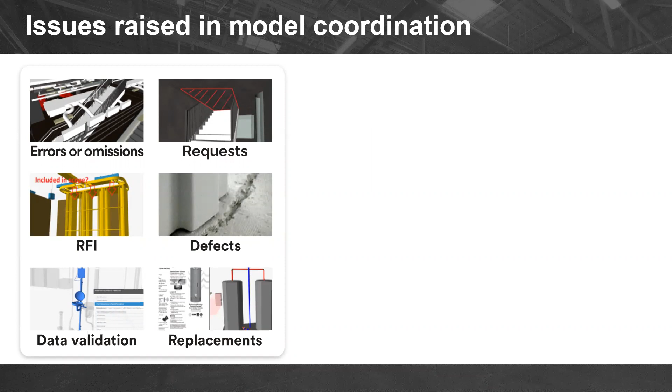So all of this ties into the platform, being able to use BIM Track as your source to access all of your issues, all of your communications while working inside of a project. Whether that be in your authoring or coordination tool of choice—Revit, Tekla, Navisworks, Plant 3D—or if you're just using the viewer on our web platform to take a look and coordinate, all of those things are at your fingertips to allow you to do your coordination in your platform of choice. So we're not trying to get you to change your workflow, we're trying to make your workflow a little easier in your tool of choice.

So that sort of brings us to what I'm sure a lot of you would agree is a fairly common workflow when we're collaborating on a project. We're going to have a BIM manager, and we all know there's many different names that encompass a BIM manager: coordinator, VDC coordinator, BIM coordinator, project lead, team lead. The idea is there's typically a group of people, or a person, that's in charge of getting everything in place, looking after that project, and then vetting it out to the rest of the team.

We get into all the people involved in the project, the architects, the engineers, all those people that are going to go through and do the design, review any clashes or coordination that comes into play. Then they take all the things they found and pass them along to the modeler, the people that are actually boots on the ground, taking a look at all that stuff and making the changes, like moving a door 6 inches to the left. And then, of course, we start that whole process all over again.

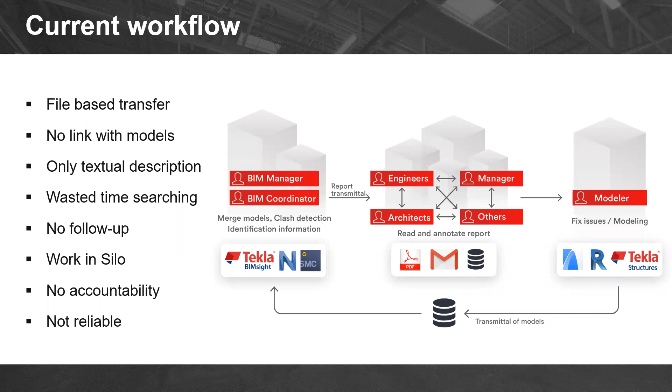So if we are working with the BIM Track platform, what this allows us to do is have that one central location where we have our communication hub. Our BIM manager, our BIM coordinator, has the ability to do their clash detection in their platform of choice, take those clashes, assign them to issues, and push them out to whoever needs to correct those issues.

Of course, we have the modelers with boots on the ground, the people sitting there to make those changes. As I mentioned before, the ones that are going to be moving that door 6 inches to the left, replacing a column, adding a column, whatever the case may be.

And then we have all the people that are going to be keeping track of the process. Perhaps they're not the ones doing the coordination, perhaps they're not the ones doing the modeling, but they're the people, the owners, the principals, people who have a stake in the project but might not be specifically involved at that particular juncture. They want to be able to see what's going on, add their comments, their two cents, and make sure those are put in place. Those people may not be working in a BIM software, so they have the ability to join in and take part from any web browser of their choice.

So that is the 30,000 mile high perspective of what BIM Track does. But I know everyone loves PowerPoint, so I'm going to take a second here to jump out of the PowerPoint, and we'll go ahead and hop right into the actual platform.

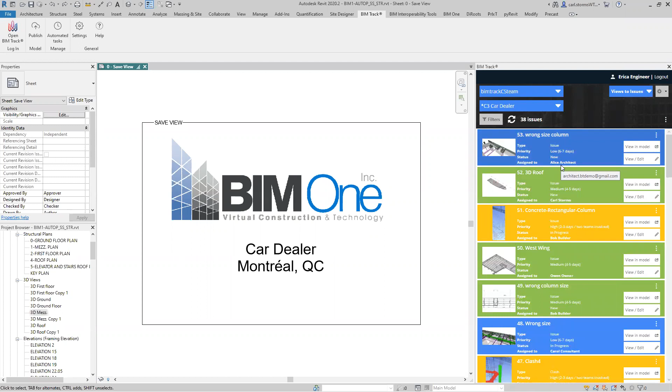All right, so let me jump inside of Revit. Here inside of Revit, this is our little add-in that gives us the ability to have access and create issues directly inside of our platform. As you see here, I'm currently organizing or taking a look at our issues based on numbers, so they're organized by the particular number. We can always use a filter to organize those issues however we want.

So we have our entire team of issues inside of here, but right now I want to put out those fires that really need to get looked after. So perhaps I'll go to my priority and look for my critical issues, and I say apply. Now I've got rid of the clutter - I have those particular issues that I need to deal with right away, and I can go ahead and take a look at those. In this particular instance, I'm just showing my priority.

All of these things like the priorities can be set in your user interface when you're putting it in place. So maybe instead of critical, high, medium, and low, you're using 1, 2, 3, and 4 - you can always set those up as you need for your project. Likewise with the coloring, you can choose any coloring scheme you want. Perhaps you don't like red as critical, you want something else - you can certainly choose that when you set it in place.

The nice thing about these is once you've spent some time in the platform, you decide, okay, I think I know my workflow. You can then set up a template inside of the admin portal that gives you your coloring, your statuses, all those things that you like at a moment's notice. You just apply that template and then it's set up. It also allows you to have multiple templates.

So if I have an institutional template, a residential template, a school template, whatever the case may be, you can have those setups because in some instances I may have different needs or desires than what I need with a typical workflow.

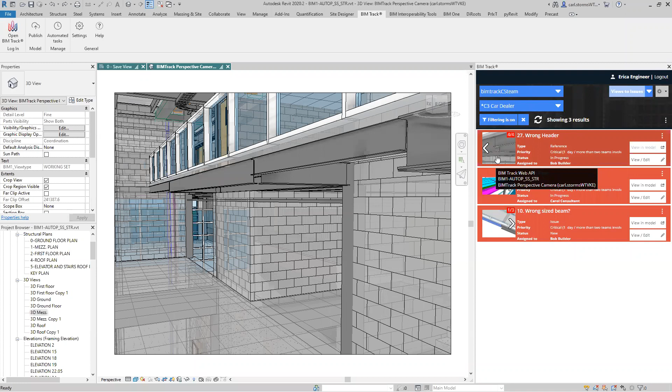We also have the ability to have multiple versions of that in place. So if we happen to have to tweak it or show something different, we can create a different viewpoint in place. If I want to zoom right in and make that what people see, I can select inside here and add that viewpoint into my project. As you can see, I have access to it.

We also have the ability to make comments. The whole idea is, well sure, it's great that I see that I have a header there, and yes, it's great that I clicked a button and it took me right to it. We then also have the ability to make edits to this, which means I can come in here and change things, assign to people, change disciplines. I also have the ability to add in comments.

For example, this has been fixed and I can post this. We also have the ability to take screenshots of what we need to do, to validate that it's actually been fixed. We can add comments, post it inside here. This gives us the ability to have a running understanding of everything that's happened inside of this process.

The other thing I always like to take a moment and discuss here is what we call issue tracking. A lot of times when you say the word issue, people automatically assume that means there's a problem, there's something wrong. There's an issue because I'm missing a door. There's an issue because the column is the wrong size. There's an issue because there's a hole in the drywall. And while those absolutely are all issues, it doesn't have to be an issue that we're using inside of the software.

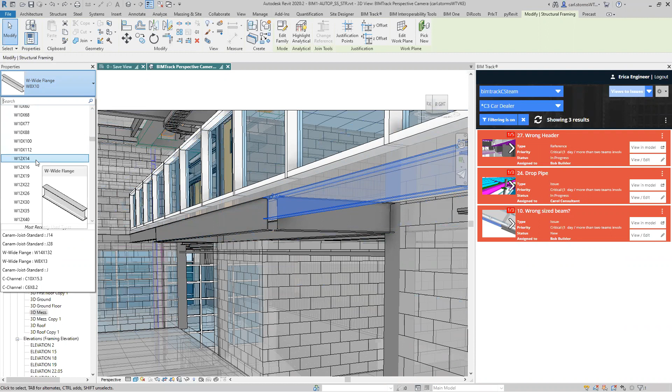So now I've made that change. Now that I've made that change, I can go back into here. I'm going to take that image to show that I've made the change, and save it in place. We said we'd fix it today, now it's fixed. Now that we've fixed it, the next thing we can do is come in here and say, instead of in progress, it's ready for review, fixed. I can notify who I want to go.

So I have to send it to Carl. He's going to validate that, and then I publish it.

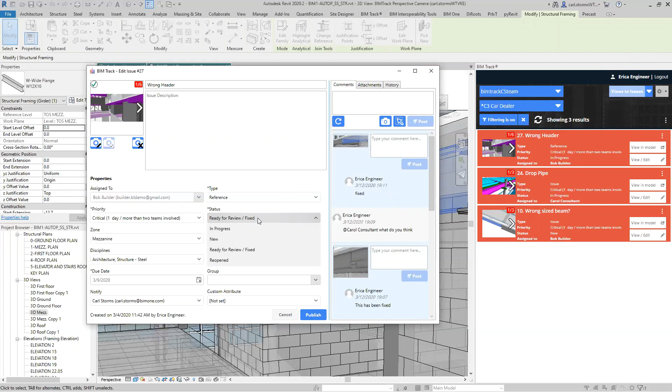One thing I like to point out that we like to see as a workflow: inside here, me as Erica the engineer, I don't have access to actually close the issue. I can say ready to fix and review, but since I'm not the person running the project, we recommend that only the BIM managers and consultants running the project have the ability to actually close an issue. That way somebody can say ready to fix, I say publish, and that status goes through.

Now if I hop over into the web browser, I click into my issues, you can see that I am logged in as Carl here, not Erica. I'm going to scroll down and use my filter again so that I can find my priorities of all the critical ones.

There's my wrong header that we were just looking at. I pop that into place. And you can see that we now have it ready to fix.

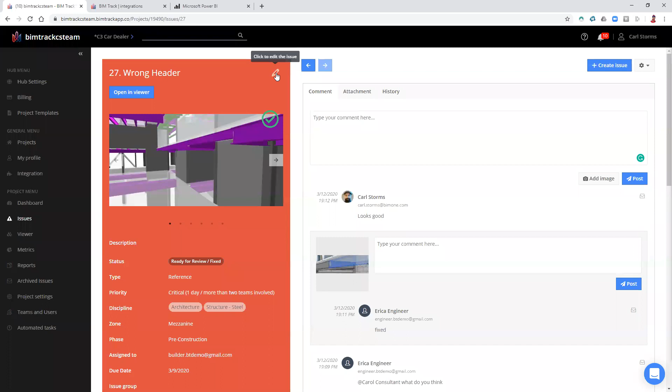I come in, it looks good, I can post that. And because I have the right permissions, I can now go in here and officially close this. I can say closed resolved because I have that permission, shown down below, hit save, and then we finish that up and we're good to go. We put that in the project. So we have that ability to do that.

You can see we could very easily see that information going from one platform into the other. Say, for example, since I'm in the viewer now and we're the owner, or perhaps the job captain, we don't work inside of Revit or Navisworks, but we need to keep abreast of what's going on inside of the process.

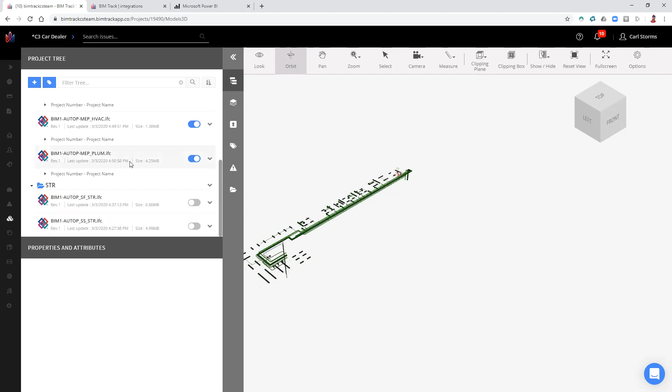So now I can come in here and start turning on my IFCs to see what's going on inside of our project. So now we've got our content turned on. Like a lot of viewers that are out there, very similar, we can navigate, move around, zoom in and out. The more we zoom in, the more information we get to see inside here. We definitely see that there is a clash here.

So we can very quickly create an issue by going to the Issues tab, create an issue. We have a couple options: either create an issue or localize. The main difference is that if we say create an issue, it's basically a screenshot of this entire area. If we localize the issue, it allows us to put a little dot, a clash sphere, right in this spot that gives us an exact location of the issue. In this case, we see it travels through many things, so I'm going to just create a regular issue.

So I say create an issue, it takes that location. I add in my information, type a description, and give it a status. Again, all of these statuses are configurable based on what you need them to be. We can assign our issue. So this is definitely a clash.

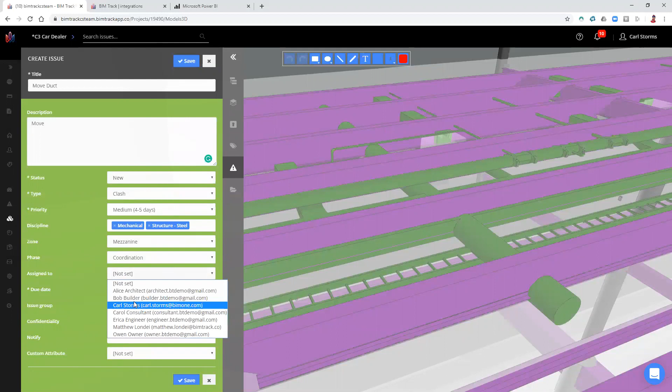You'll also notice that we have a few of these asterisks. Asterisks essentially mean that it's something that has to be filled in, whereas something not asterisked can be left not filled in. So it's going to be mechanical and structural. For the zone, again you can set it up—this is my mezzanine. And then I'm going to assign it to my builder. We've assigned that issue and put it into place. We now have access to be able to do that.

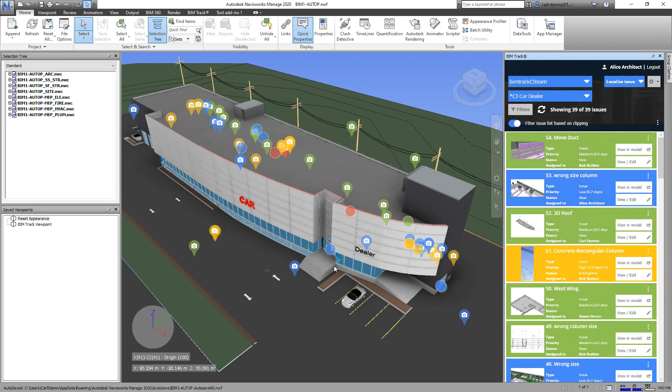If I just quickly pop into, let's say, Navisworks, same project, I quickly sync that up, and you'll now see that we have the ability to see that inside of my model. Now, I do know that I have a roof turned on inside of Navisworks in my architecture, so I'm going to go ahead and hide that, and then hide my structure. So now when I go to view the model, it's going to take me exactly to where that duct was running through, that we can see, we have that ability. It gives us the ability to go and see what we have and where it comes into place, and we can see that directly from there.

We can zoom in, take another one of those, and update our viewpoint.

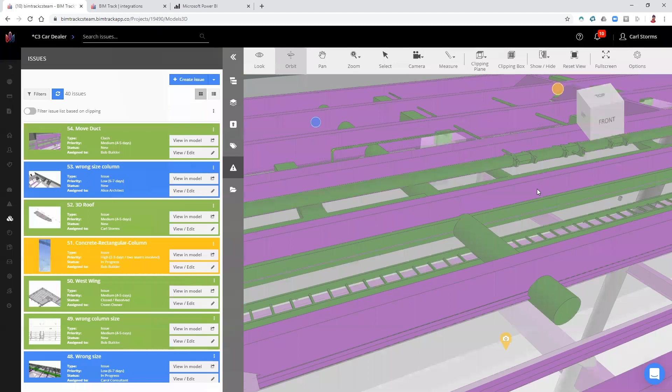Let me do it here. So now you see we have those two viewpoints in place to give me access to that content. Quickly jumping back into here, that gives us the ability to see through different platforms and view it inside the web browser.

Just keeping mindful of the time here, a couple quick more things to show. We can also do 2D and 3D at the same time. So if we go into our sheets, for example, and I turn on my mezzanine plan, this is going to give me access to a PDF version of the sheet.

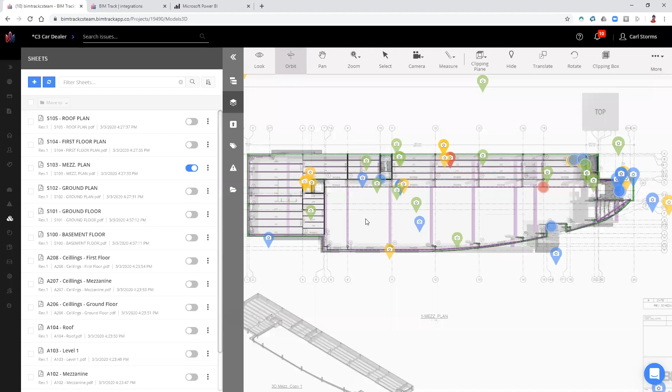All of the models are IFC models inside our viewer, and all the sheets are PDFs. So as you can see, it gives me access to all of my viewpoints, all of my clashes. And if I zoom in, we basically have the sheet in the right place and time, so we have access. You can see the 3D model, and we can also see the information on the 2D sheet that wouldn't be inside the model.

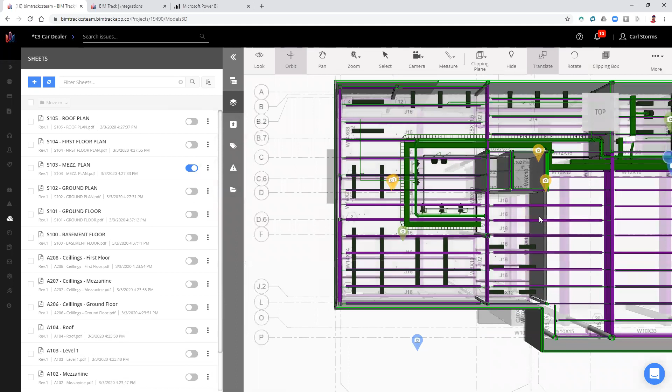If I use my view cube to navigate a little bit, you can sort of see that we've got that 3D functionality. And if we clip into our clipping plane, bring on the top, I can even start adding a little more information, so now I can start seeing that information in that 3D view. I go and look down, and I can now start seeing some of those things in 3D, as well as being able to read the information that comes through that 2D functionality we put into place.

And again, we could create an issue directly from here and be able to see what we want to do as we're working our way through when we put it into place.

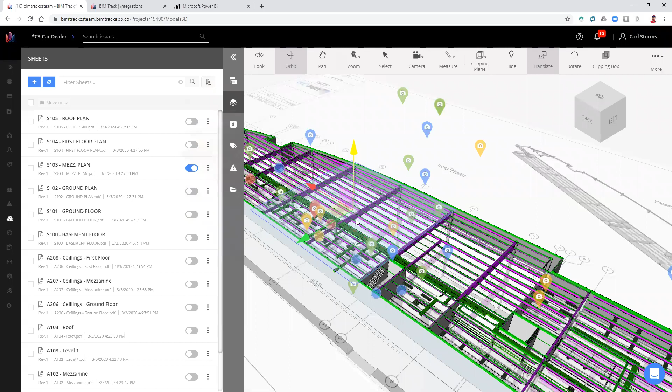The other thing I wanted to show here is the idea that we have the ability to do our analytics. So if I quickly hop into here and go into my reports, I can hit up here on print. It's going to print out a report. Now, in a second, we're going to see a little print screen because it thinks I want to print the report, and I can actually physically print it, but really what I'm looking for here is the intelligent PDF that it creates.

So you can see it's now giving me information, showing me all the different assignments, who it was assigned to, priorities. Each one of these allows me to be interactive with what we put into place. If I scroll down a little bit farther, you can see that we've got our issues that came into place, and if I scroll all the way down to 24, I think that's the one we were looking at with the header in place.

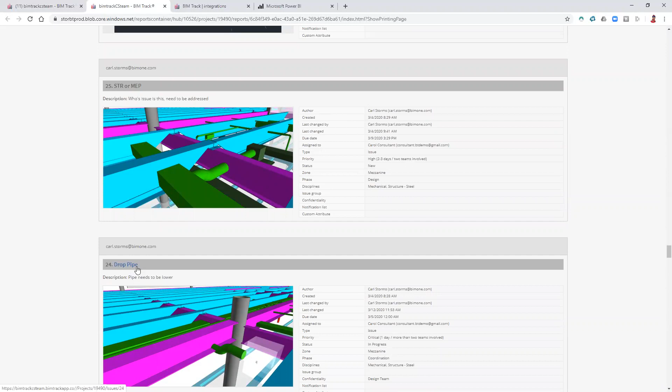So as we get down, you start seeing that we've got these issues that are also interactive. Whether I'm doing this through the web interface or actually looking at the PDF, when I click on this, it's going to take me directly to that issue inside our web platform. I have the web platform open, so it happened very quickly. If you were actually doing it through the PDF, it would fire up your web browser and take you to that, assuming you were logged in.

But again, we have the ability to have those PDFs and look at our information directly. And if we just want to see the information, we don't necessarily need to print a report - reports are great for a coordination meeting. We can see that right here in our dashboard using the metrics. It's the same thing, you can see we have these live bits of information about who they're assigned to.

Maybe instead of the person, we want to see the disciplines. So now we see all the different disciplines. I want to focus on mechanical, so now I see that I've got 18 issues with mechanical. I can see who they're assigned to, but I'm more curious about the priority, so now I can see that I have 2 issues that are critical for mechanical.

I can dive down a little bit deeper, I can see who they're associated to, and then once I get down to that essential issue, I can go take a look at that issue and find all the information. So we're able to see this real-time information and sort of dive down into it and really see what it is we're going through.

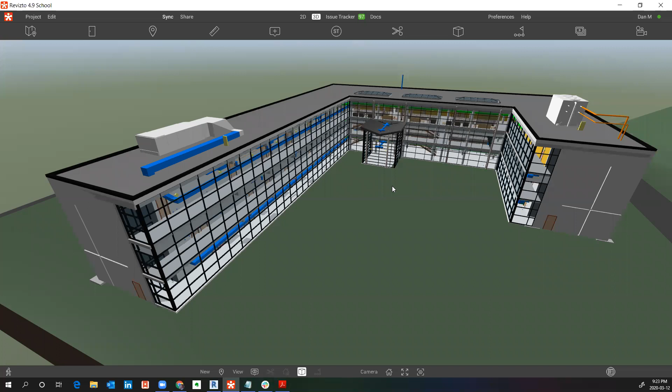So as you can see from the model that I'm in right now, this model came in from a federated model from Navisworks, and the sheets came in out of Revit, and I think some of the sheets came in from Procore as well. And we use the Unity game engine, so it's a pretty smooth and nice experience to be able to explore the project in 3D.

And on top of the 3D geometry that you see here, we also bring in the metadata as well, so you're able to see all of that inside of Revizto. But like I said, I want to start with 2D, and we'll jump back into 3D in a minute.

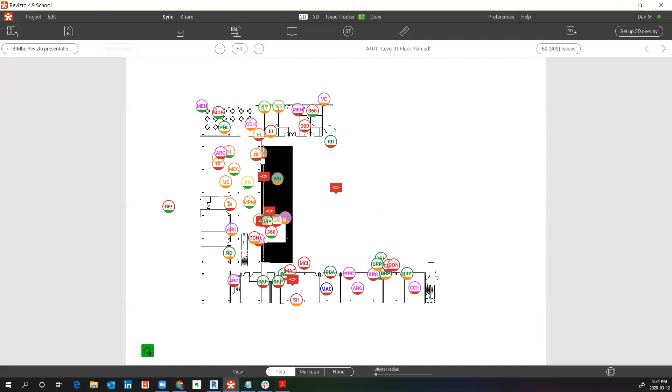So I'm going to go into 2D. I have my PDFs of my PowerPoint right here in our 2D sheets, but I'm going to go to the floor plan. As you can see, you've got a floor plan here that has some icons on it, and these icons all represent issues that have been identified in the project. The icons all have different information that they're communicating to me just by looking at them.

So I can look at the project, look at any one of the sheets here. I can take a look at the sheet and click to see the markups that have been marked up specifically on the sheet. Those pins, those issues I talked about before, every issue in Revizto sits in the X, Y, and Z coordinates, so you're able to see your flow.

I just want to let everyone know that there is some background noise. Oh, is there? Okay, so unfortunately it's outside of our control, but we're just going to mute ourselves so that the recording is cleaner. Okay, we'll do that. Yeah, and you can continue. Thank you. Hey, no problem.

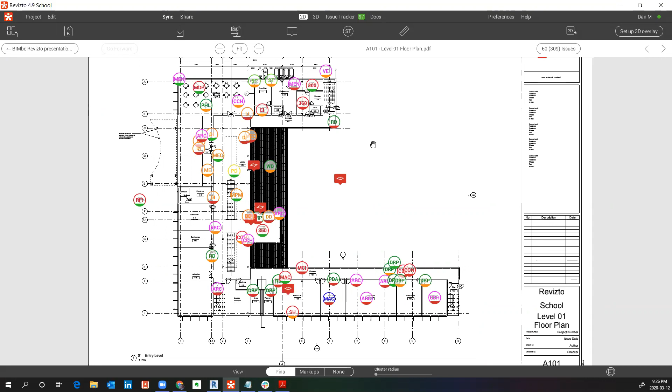So as I was saying, all of these issues lie in the X, Y, and Z, and you'll see an illustration of that when I get into the actual issue tracking workflow in just a moment. But I want to talk about the 2D, 3D relationship I was just speaking about. With Revizto, when we bring our sheets in from any BIM platform, Revizto automatically holds on to that relationship between the sheets and the 3D model.

So the idea here is that with democratizing BIM, we know that Revizto is going to be in the hands of people who don't normally use Revit or Navisworks, as well as people who work in Revit and Navisworks. So we wanted a very easy to use interface. We also wanted to be able to take a superintendent who doesn't spend a lot of time in a 3D application, or maybe no time, or perhaps a principal of an architectural firm who is on top of the project and communicating with the owner but doesn't spend any time in Revit.

We want to give them the tools to get into this project and explore it. So here's the 2D sheet, probably the way they would prefer to go through the project. But at any time, they can go to the right-hand corner, click jump to 3D, and take themselves directly into the model straight from the 2D sheet. The real value of that is that it drives adoption in an organization. Somebody can use the standard workflow of marking up 2D sheets if they want, but know that they can get into the 3D at any given time.

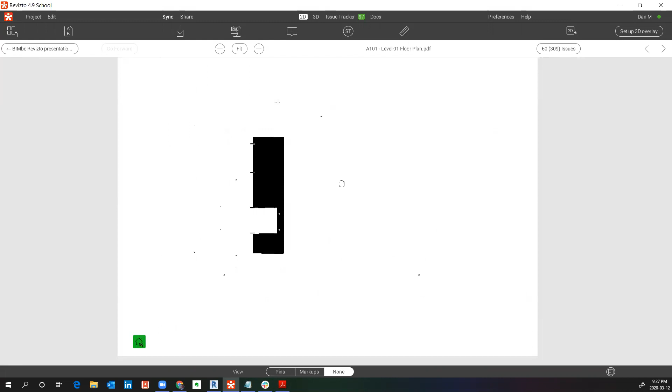Now, Revizto also allows us to have overlays. So every single sheet that comes in from a BIM platform—or we also have a manual process to apply this—automatically creates an overlay. So when I click on this icon, Revizto is smart enough to know that this 2D sheet should lie on top of the first level of the project. It should cut a section to that level and line this 2D sheet up with the actual model.

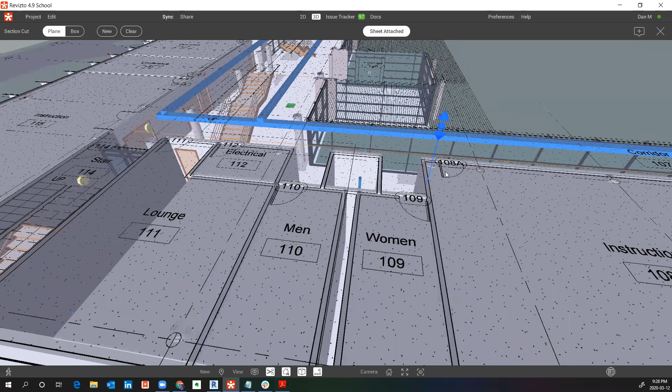So I can go down here, I can see the 2D information, I can see the 3D model. I can pull that through if I want to get into the ceiling, or I can put it down here on the floor if I wanted to and detach that sheet. So now that I've detached that sheet, I can leave that as a guide as I walk through, and maybe I found an issue related to this column here in the stairway, and I want to mark that up.

I can simply create a markup by hitting the plus sign here. This pinpoints out where the direction is. Let's say I want to go into more specifics than that—I can actually use markup tools here to mark this item up.

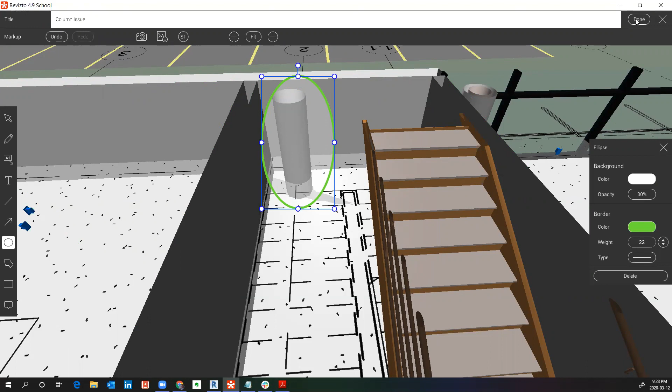And I can create my issue here. You'll have to excuse me, guys—it's 9:30 my time, and I get up typically at 5 in the morning, so we'll see how I do through this. My spelling will probably be suspect at best.

So what I've just done is I've created an issue. That issue automatically went into our issue tracker, and it captured the screenshot. It also allows me to navigate the 3D from here, and it also allows me to see the 2D sheet.

I'll get back into more detail with the issue tracker in a minute, but just so you understand, when I go from any 2D sheet inside the project, I have the ability to jump back into the issue tracker and save the 3D information with the 2D.

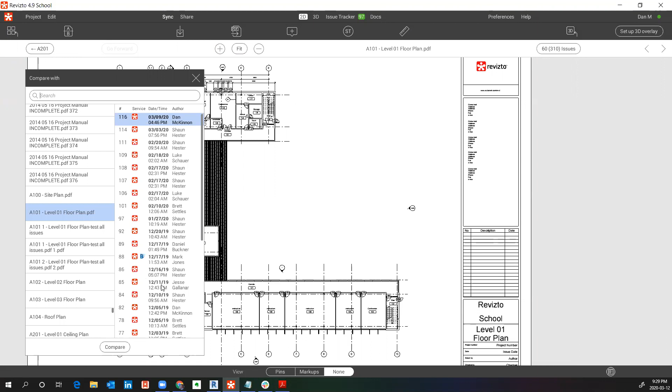We also have other tools here where I can take measurements. We've got a sheet compare function, so if I want to compare this to an earlier sheet, I can do that and see if there are any differences. There isn't on this particular one, but it will highlight any differences.

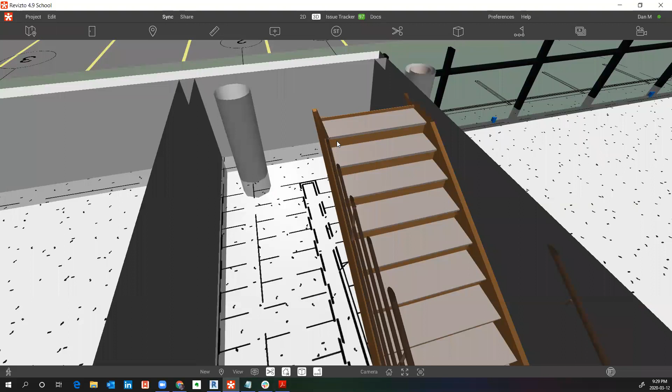So if somebody wants to work in a 2D or 3D workflow, they're going to be able to do that here in Revizto. I'm going to jump back over to 3D, and we'll illustrate some of those things more clearly in a second.

I want to get into moving around and interacting with this 3D model. As I mentioned, in the model itself we have all of the geometry, and we also have all of the metadata. So if I click on any object in here, it doesn't matter if it came in from AutoCAD, MEP, or Revit—whatever metadata is associated with any particular object, if I click on it, I can see that information.

One of the things that really stands out about the way Revizto works is that we aren't a web-based platform. What that means is we use the web to synchronize our project and sync it to the rest of the project team.

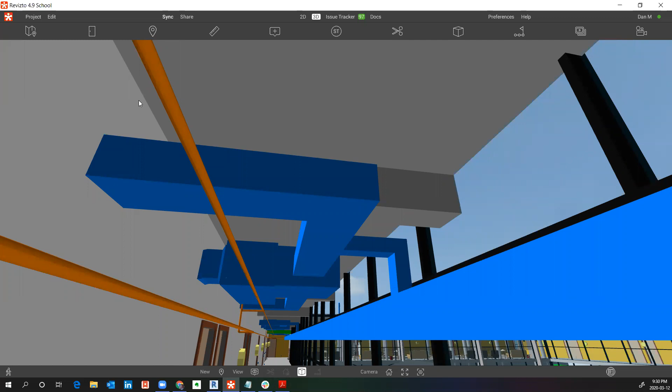But I'm actually able to take any project I'm working on and decide to download it for the field, including every single bit of content I have—the 2D markups, the 3D markups, the sheets, the model. If I've got Procore or BIM 360 documents associated with it, I'm able to bring all of those out in the field, and I don't need a persistent internet connection.

So when we've got a superintendent or contract administrator down on the 4th level of a parking garage without an internet connection, they can still mark up things, still take photos, still do their job, even without a persistent internet connection. That's something really important to highlight about the way Revizto deals with that.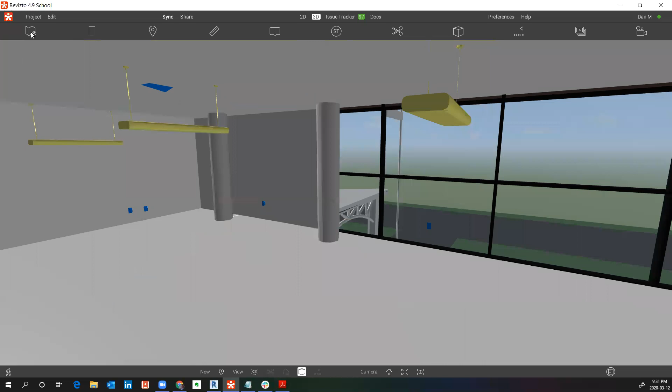As a result, we give you tools to work in the field. For instance, with our map tools, similar to what I did with the 2D sheet, I can click on an area and jump into the model. This is a nice way to navigate if you're on a tablet without a mouse and you're out in the field—you can move around from that perspective.

We also allow you to bring in all of your room tags. Once they're on, you can see them in the project—they show up here, and I can take any room tag and simply teleport into that location.

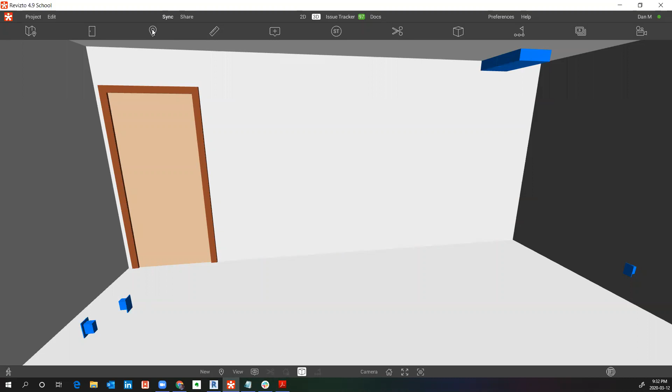We work with clients who come from just about every conceivable mix of software and workflow. A lot of times you'll have somebody saving their views in Revit, or saving viewpoints in Navisworks, and they still have value in that process and want to send them into Revizto to work with. We allow you to bring in your viewpoints, and we also allow you to create viewpoints, giving you the opportunity to save specific views inside the project.

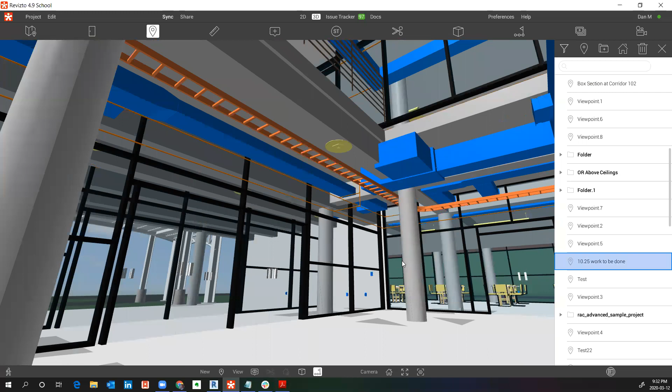If I've got a specific view I've isolated that helps communicate a specific area to the rest of my team, I can save these as viewpoints, or even mark up from these perspectives. So you can see here we've isolated the mechanical, plumbing, and structure, and in this one we've got a color-coded mechanical, electrical, plumbing, and structural version of the model. This gives us the ability to isolate these things.

Similar to what Carl was saying, a lot of our customers will use Revizto to run their coordination meetings, where they're able to isolate the model, use Revizto, which is a non-destructive environment that they can move around in the model and not accidentally move something in Revit or Navisworks, but instead they can walk through in Revizto and mark up things in that coordination meeting.

I'm going to hit home. Everything that you see whenever I have a view in here is just impacting me. So I could have 200 people working on this project with me, but the view I have is just the view that I have singled out for myself.

Now I'm going to take advantage of our laser ruler here, and I'm going to measure. I can use that and create an issue out of this. We also have measurement from 2 points. We can do minimum distances, spot elevations, and slope measurements in here.

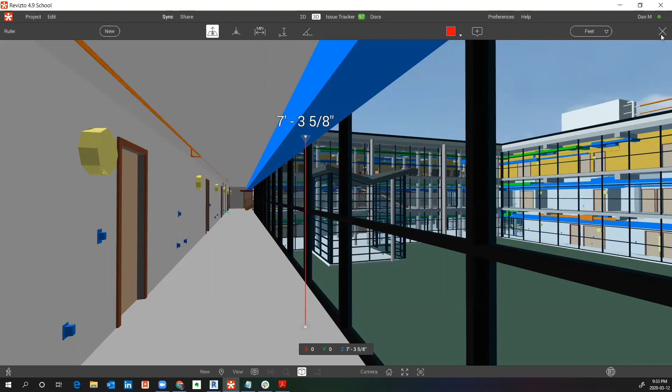So the idea here is to give you tools, whether it's in 2D or in 3D, to get the kind of information that you need to communicate to your team or make decisions. And that's ultimately what we're trying to do here, is make sure that this integrated collaboration platform is the place where the communication all can happen.

So the plus sign and the ST are both for creating issues, and I'll touch on those in just a moment when I get into the issue tracker. But I wanted to cover a couple other things in 3D about how you can interact with this model.

So the scissors tool here gives me the ability to create section planes and section boxes on the model itself, and you can see it's just as simple as setting this against the surface and pushing it and pulling, and then I am able to explore the model with this added advantage.

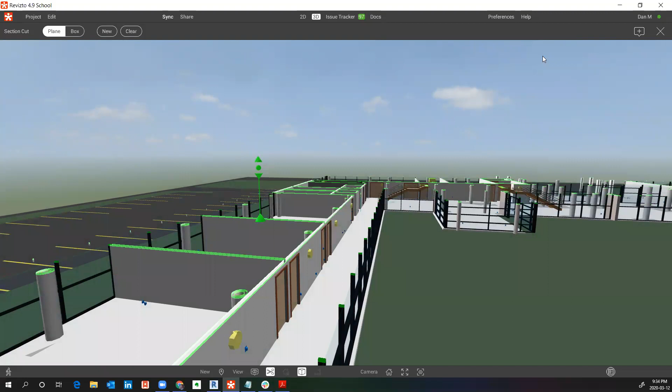I can create an issue in this view. Like I said, I can create a box as well as a section cut. And when I hit my home view, everything is reset.

So the site had been scanned as a point cloud. The building they were renovating there was scanned as a point cloud. They had an existing building that was part of the project, and in Revizto they had the legacy PDFs of the design. They had the scan point clouds in there, and I'll show you scan point clouds in Revizto in just a few minutes.

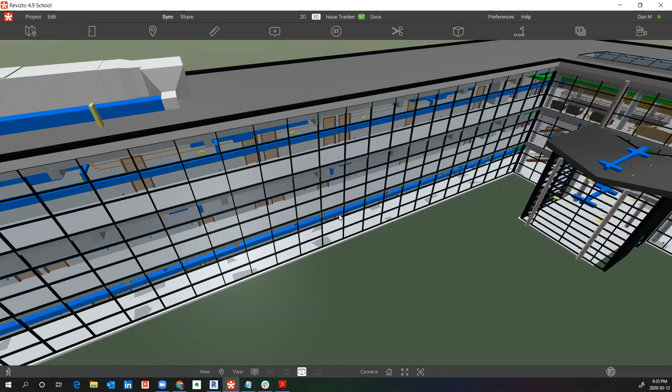And they also had all of their BIM models. So we were able to see those in the trailer, and we were able to walk the site with an iPad and be able to see all of these in the actual environment. And you could see how quickly it communicated design intent to the project team. So that's a big part of having that live interaction.

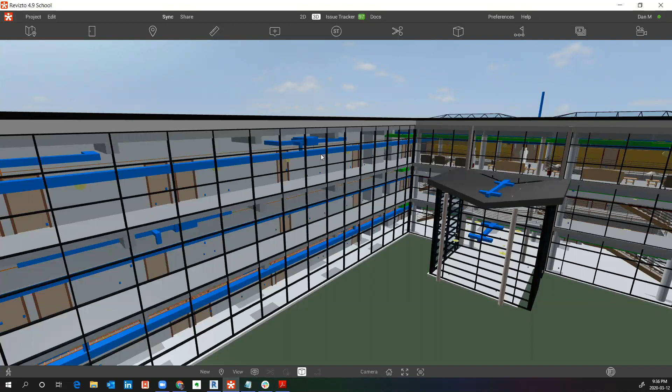That you can jump into the source of information that you need, whether that's 3D, 2D, point clouds, being able to get into that perspective to even look at them all at one time. But we also recognize that data is a big part of what you want to interact with inside of your project.

So this cube actually activates our object tool inside of Revizto, and 5.0, our newest version, will be coming out this spring, and that will have a brand new object handling. Right now, we're able to itemize objects by their category in Revit and by the file types. But we'll have a lot more detail on that, not that I can disclose really right now, but just to let you know. I'm going to show you what we can do right now, which is pretty cool.

So right away, I've got the ability in this project to see all of the different categories of objects that are in here. I'm going to go into the links. So you can see we've got multiple links that are on this project.

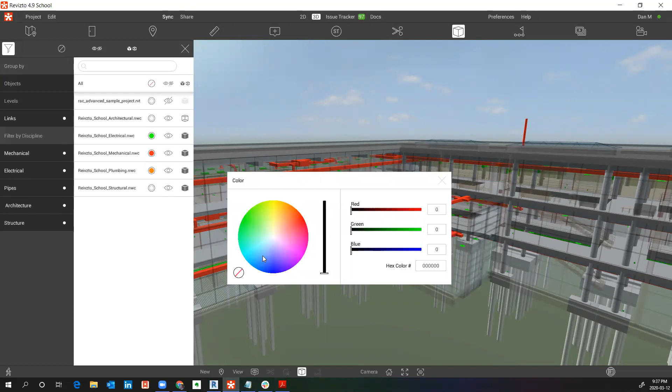I'm going to take the architecture, make it transparent. I'm going to take my electrical, make that green. I'm going to make my mechanical red, I'm just going to go orange. And my structural is going to be blue. So I have, in a moment, color-coded these things. And I can go through and color-code specific object classifications as well.

I can use this as a tool to do some visual checking. We support bringing clash detection in from Navisworks and from Solibri, but sometimes those initial decisions before you're ready to get into that clash detection might require you to be able to get in the model and isolate some of these particular items so you can see them better. Revizto gives you that ability to go in and get a view into the model or the sheets to answer those kind of questions.

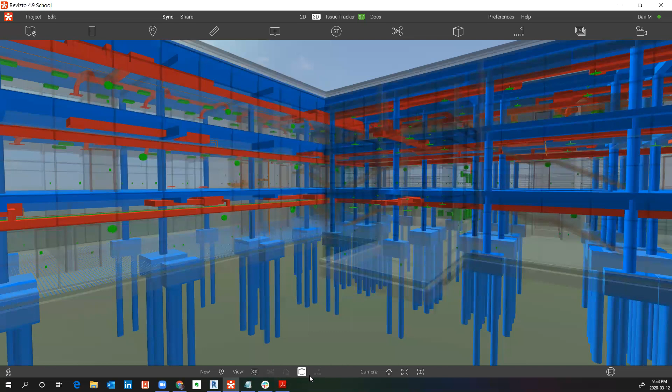Just like before, I'm going to hit the home button and it's all reset. We support phases coming in from Revit. We can camera share, so you can see I've got some of my project team on here right now. I can actually take control of their screen and walk them through the model and drop them off at a specific spot.

This also works in virtual reality. So once this model has been pushed out from Revit or from Navisworks, it is now VR ready. We can, with one click, open this up with the HTC Vive or the Oculus Rift and go through this model in VR, and I can share that camera with them as well. So we've got the ability to get multiple people into this project and communicate with each other in a few different ways. Additionally, we can record videos with narration as another way to communicate these things to the rest of the project team.

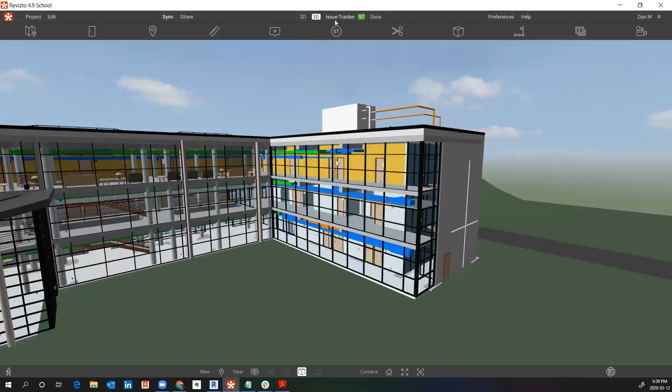So that's a quick view of 2D and 3D, but I'm going to get into the issue tracker, which, at the end of the day, there's lots of value inside of Revizto, but I'm sure Carl would say the same thing about BIM Track, that what really matters is what you can do with communicating issues and different design intents or construction issues that you find, and getting your whole team on board as soon as you can.

The feedback we get related to using Revizto on a regular basis is that a lot of our clients had a typical scheduled coordination meeting on a Thursday, and all these items would show up on the agenda over the course of the week, then they'd get into that meeting on Thursday and start to go through it. Well, with Revizto, because our issue tracking is real time, somebody might post something right now and immediately get feedback from another member of the project team, and the communication might go on, so what ends up happening is it serves like a 24/7 coordination meeting.

A lot of the time, these items identified at the early part of the week go through the process of communicating about the issue, suggestions for resolution, and then a number of them get solved, so that when you get to that Thursday coordination meeting, the agenda is a lot lighter, and hopefully allows those expensive people that have to come into those coordination meetings to spend their time on big picture items and not dealing with all the nitty-gritty of issues found on the project. That's the feedback we get an awful lot.

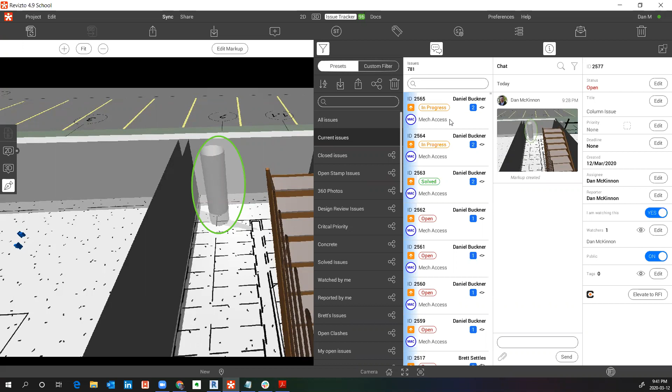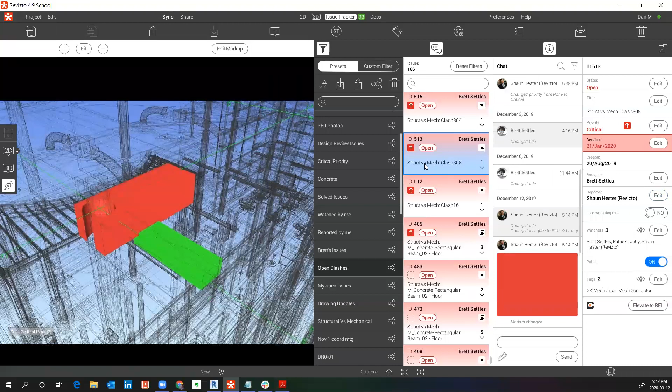So I'm going to talk a little bit about the issue tracking. As I showed you before with that quick example, we can have issues marked up in 2D. We've got issues marked up in 3D. We've got issues in here that are actually synced clashes that came in from Navisworks, so they come in with the information that came from Navisworks. You can see here's a structural versus mechanical clash, and here's a screenshot of it.

But I can go into the 3D model, change the visuals here related to the model, and explore the model in more detail.

I can also see where this corresponds on the 2D. But I mentioned earlier that Revizto puts all issues in an X, Y, and Z coordinate. So even though that issue was identified through clash detection in Navisworks and marked up in 3D with a screenshot here and this 2D image, you'll see I've got a smart index, and that index lets me open up all 2D sheets that interact with that X, Y, and Z location.

So I can look at this in terms of the floor plan here if that's how I want to see it. One of the things that comes from that process is that all of my 2D sheets represent the issues, my model represents the issues. What it means is all members of the project team working in Revizto are going to see issues regardless of which sheets or model they're looking at.

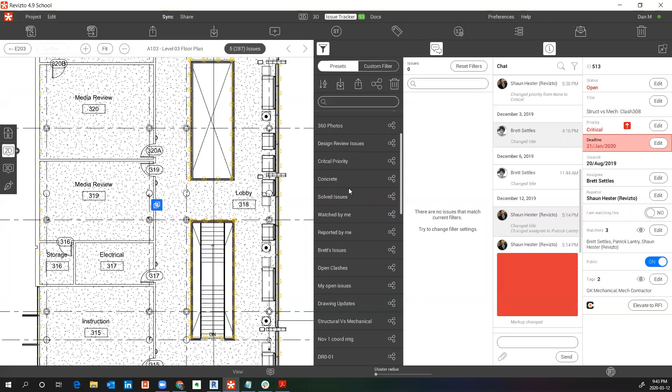Because most of the time what you're dealing with is the non-BIM person using Revizto exclusively. The BIM user's workflow is going to be that they might have Revit or Navisworks on the other screen while they're using Revizto. So I'm going to go in here a second, go back to all my open clashes, and open up this one here, and I want to show you that screenshot again. And I'm going to open up my Revit for a second here.

Oh, I must have already done that anyway. Hold on a second. Let's bring it back to... Yeah, excuse me a sec. I hit something. Oh, don't be silly. There we go. All right.

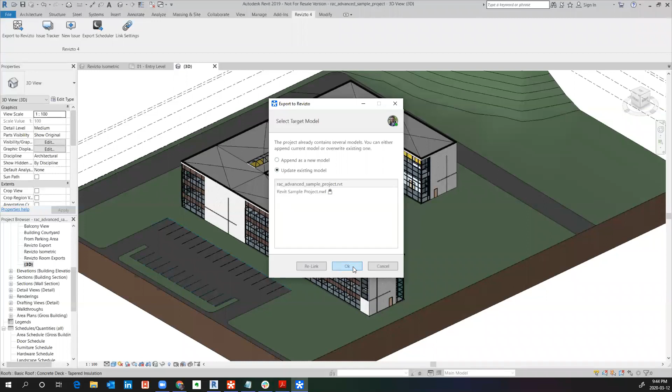So we use a plugin to communicate between Revit and Revizto. I can export to Revizto from here, and I can choose what I want to include. So when I want to send the project out, I can choose what sheets and what level of detail I want to include with that. I can also put it on an export schedule and do the same thing. I can create issues directly out of Revit if I want to as well.

But the other important part about this is that plugin lets us communicate between Revizto and Revit, or Navisworks, or AutoCAD, or Tekla, or whatever platform you're using. So when I have this issue here in Revizto and it's time for me to resolve it, I click on the issue here in my issue tracker, and I go back into my Revit model, and it takes me right to that clash and isolates it for me so that I can make this into a working view and solve this problem if I want to.

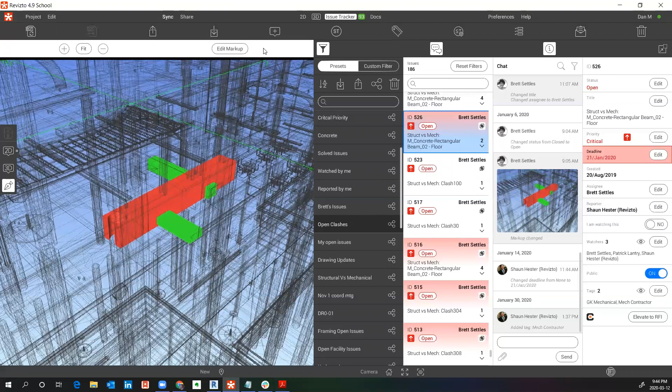So the idea here is to work in tandem with the authoring tool that you want to use, but you can use Revizto to do all of your actual researching and resolving of the issue. So let's create an issue and walk you through the process. I had created one manually before. This time I'm going to create one using our automated issue stamp so that you can see how that works.

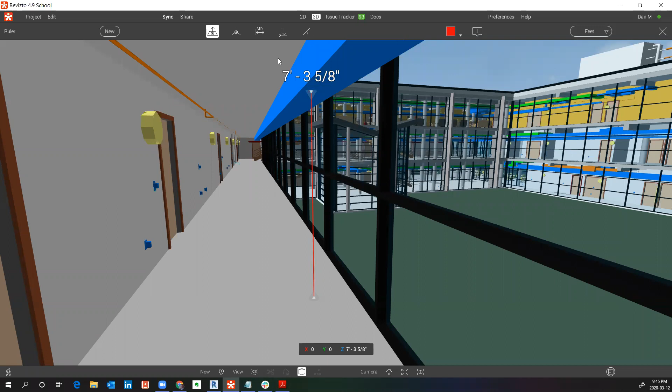So I'm going to go over here, and I'm going to say my issue's here, and I'm going to use that laser ruler that I showed you before, and let's say that's actually supposed to be 7.4 instead. I want to capture that particular issue. I could manually set that up and point to that particular issue, but let me try that again.

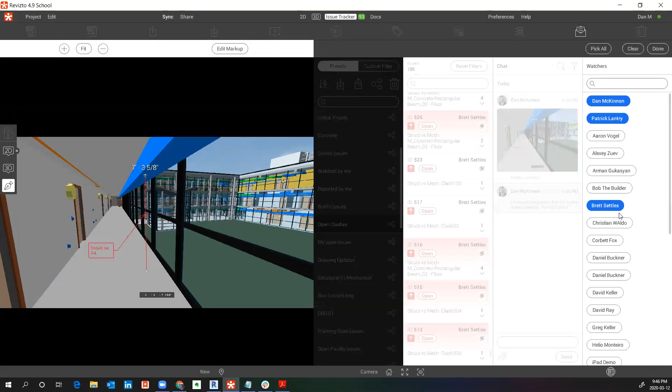So that is the way that an issue is created manually. When I create that issue, I would then go through here and assign a priority if I wanted to, a deadline if I wanted to. I'm going to assign this to another member of my project team. I can give this one to Pat. I can add watchers to this—let's say, for instance, Brett is the manager on this project, and I want him to be aware of what's going on here. So I can also go in here and add tags to break this down more clearly as to what I want to have on this particular issue.

So this is where I can drill down. I can add files, photos, 360 photos. I can add a comment related to the issue here as well. Now see, Pat's already on here—he's just changed this issue from open to in progress. So I now know that he's working on this.

So this happens all in real time. Pat's down in the Boston area right now, and I'm in the Niagara region, and Mark has jumped on here as well. I better make that a private issue then—Mark just indicated he doesn't want the owner to see that, so we'll make that one a private issue. So that's going through the manual process of creating an issue in Revizto.

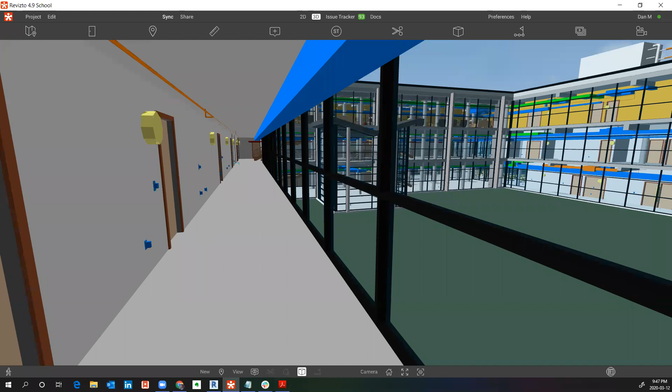But like I said, I wanted to talk about creating an issue from a stamp and show you the power of our automated stamps. So I've got this issue here. I'm going to click on this door so that I know that's what I'm covering. I'm going to take a stamp—I've found a door repair issue here. I put the stamp down. As soon as I put it down, all of the parameters I assigned, all those issues you just saw me deal with, have already been decided, because as we set this project up, we established automatic rules for what we want a door repair to look like. So in this case it's assigned to Mark, and we already have watchers on it.

I can go through here and still add commentary if I want to, or questions. I can attach files and photos, or in this case I'm actually going to go over to our doc integration, so I can show you that.

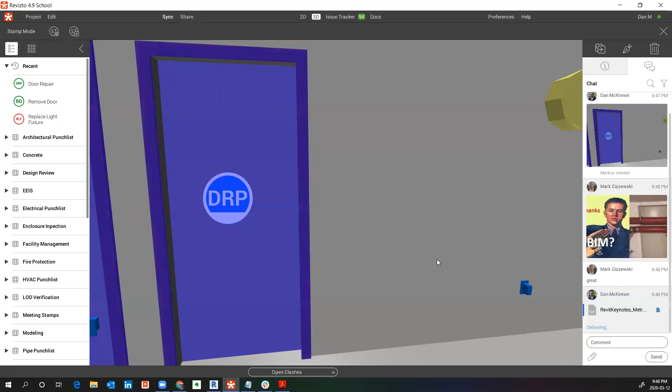So we integrate with BIM 360, Procore, and Box. What that means is I can have documents, perhaps my contractual documents from Procore or BIM 360, coming from other members of my team. I can go in here and associate any one of these files to this, click it in, and add it to my particular item. So I'm just going to put that text file in there and attach it. So now that's been put in there—you can see we've got the ability to set that up a whole lot quicker as a result of the automated stamps.

So automated stamps do a couple of main things for us: they speed up the process, but from a BIM standard perspective, stamps really drive the standards on a project and make sure that everything you might be setting up for your reports is accurate, because nobody has to manually select a tag or go through the process of assigning it to a specific person.

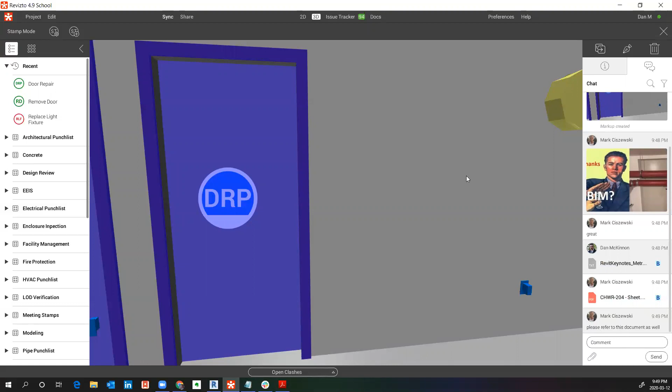Now you can see as I've been talking, Mark has been adding additional information to this, so we're seeing this move further along towards resolution. That's all sitting here in our issue tracker, and it's communicated to Mark as he worked on it, and to every watcher as things change. Mark is apparently trying to drive me to make this a private issue as well—I don't know who even invited him into this.

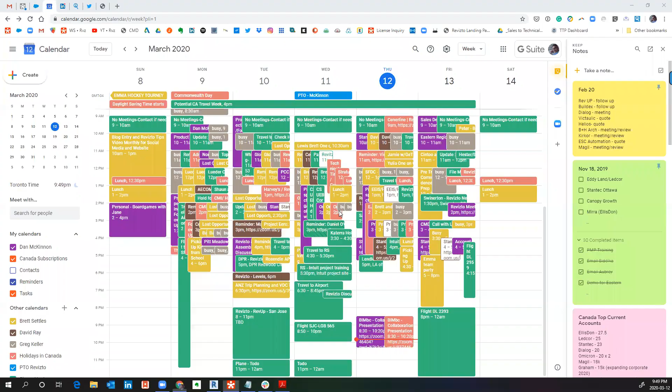So with that being said, what I'm going to do is talk about our reporting now. I want to take just a moment to talk about that related to the project. We have two different aspects of our software for reporting: a live dashboard, and a report section as well. With the live dashboard, I can go through and set up charts to show me pretty much anything I might want to see on the project.

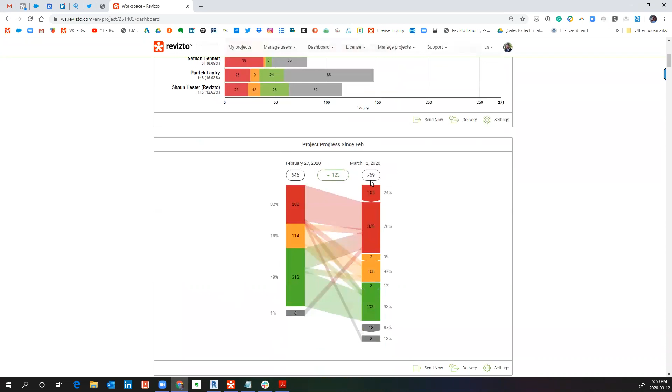I can see these issues per user—poor Brett is getting slammed here. You'd think we would use this information to reassign some of this stuff so he's not getting slammed. I can look at the progress from a specific date, I can look at issue timelines and so on, and these are all live reports.

So say, for instance, I'm not interested in the solved issues, only open and in progress—I'm going to kill those so I can look at all these. So I've got the ability to interact with this chart in real time. And then our reports—I can create reports sent out to members of my team, either as PDFs or Excel. So I'm going to look at the open clashes for a second. This is a PDF report, and I can choose what I want to include in it.

In this case, it's picking any open or in progress clashes, and every Tuesday it's sending these out to Bob, so he gets a copy of this report that's sent to him. Now I'm going to show you a copy of a clash report that I pulled.

It's not from this project, but it'll still illustrate what happens with these reports. The report captures a thumbnail that we can download in high resolution. I can click and open this up straight in Revizto from this report. All communication that happens on this issue, any changes to the status of the issue, updates in the screenshots that have happened, all of this is in here.

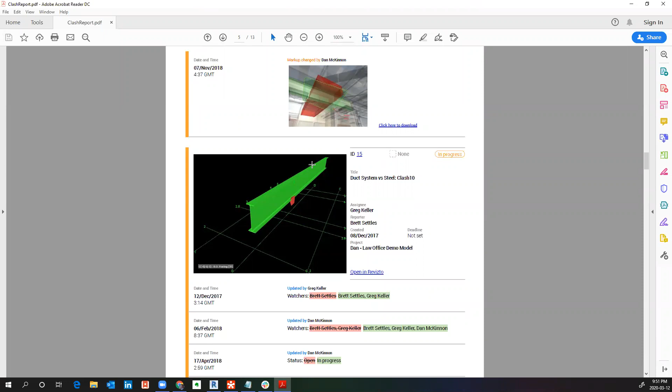So consider the process of creating issues out of Navisworks: you might get a screenshot, email it to someone, hopefully they acknowledge they've gotten it, you create an XML report manually, and that report is obsolete by the time you finish getting it together. Well, in Revizto, all of this is automatic. Typically, the feedback we get from most of our GCs or engineering firms using Revizto in tandem with their clash detection process is that they'll save 40 to 50% over using just Navisworks by itself for that process. So that's a big part of the workflow there.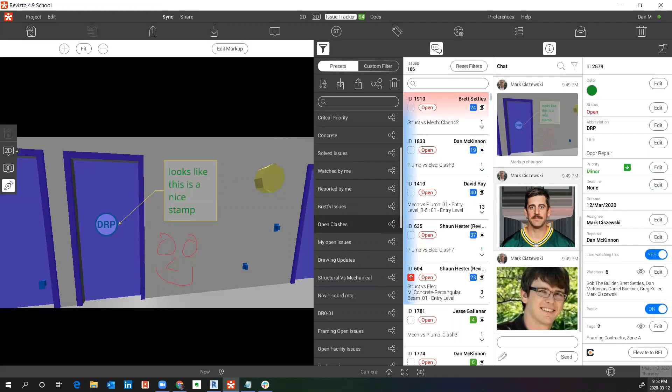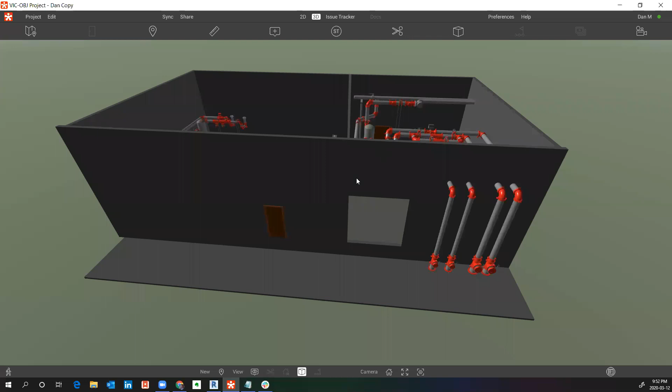Now I think I've got just a minute or two left, but I wanted to show you guys point clouds, so let me go into there. This model right now, you're going to look at it and all you're going to see is a Revit model because I have the point cloud turned off. I'm going to go in here and turn everything on.

So the fine folks at Victaulic, who we work with both in the US and Canada, use Revizto as part of their installation workflow. As you can see, once we get a point cloud model in here, it behaves just the same as the BIM model does. So here I am going through my model right now, and what you're seeing is my BIM data, my BIM model. I can still get my metadata from it. Here is my point cloud information.

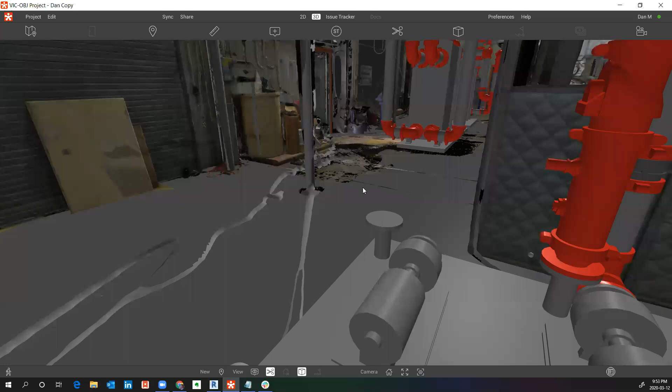I'm actually able to do things like, let's say for instance, I want to measure across to a point. From the point, I can go from the point cloud, I can go from the BIM, and I can measure from these in the same environment. So we see this a lot for construction verification, where people will scan the environment and compare it to the BIM, make sure that your connection points are lined up, make sure you've got space to bring a piece of equipment in here.

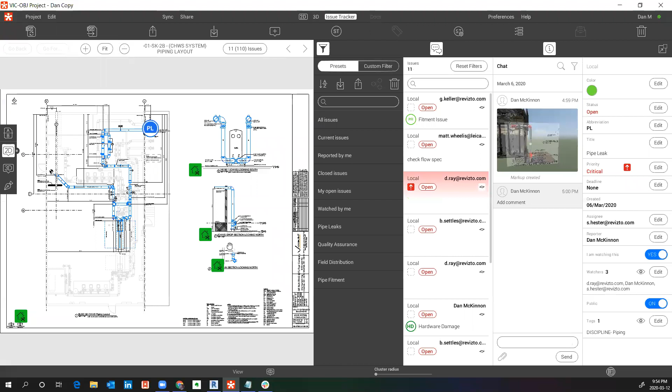But similar to what I showed you before in Revizto, we don't isolate any particular aspect of this. We're not a suite of products that all barely talk to each other. Everything is in the same place here. So this means I can go through here and say, okay, I actually want to take a look at this 2D in conjunction with the 3D in conjunction with the point cloud all in one environment.

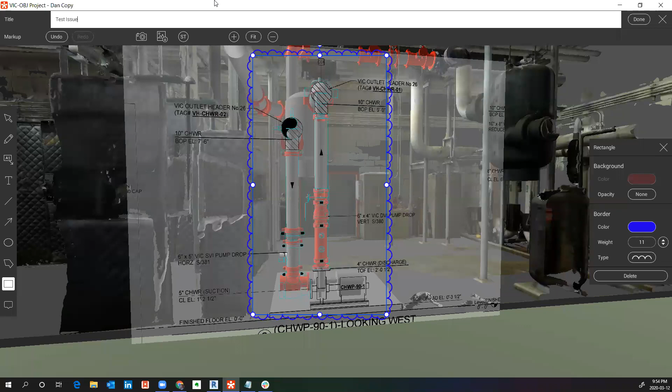So do you think if somebody is trying to figure out what they're going to do on site, that they've got enough information when they can bring the 2D, the 3D, and the point cloud into the same environment like this? And if this doesn't match up, they've got the ability to create an issue here, and that issue goes into our issue tracker.

But what that issue has just done is somebody has gone to the trouble of marking this up, but the person who has this assigned to them -- oh sorry, I'm the only one in this model -- the person who has this assigned to them is going to be able to see the screenshot that captured the 2D, the 3D, and the point cloud.

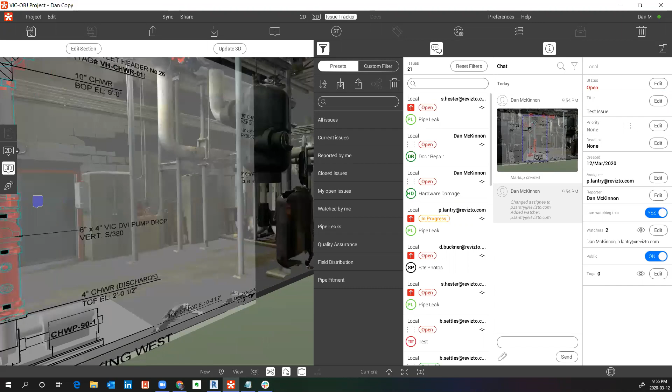They can go into the 3D and actually explore this. They can turn off the 2D if they want, so they can see this clearer. They're able to see how it relates to this 2D sheet, and how it relates to other 2D sheets. So the idea here again is that we're trying to give our clients the tools they need to get to the heart of a problem right away and communicate it correctly and accurately to the rest of the project team.

So I think that's pretty much what I was going to cover. We're sitting at 5 to 10. How are we doing for time here, Edwin?

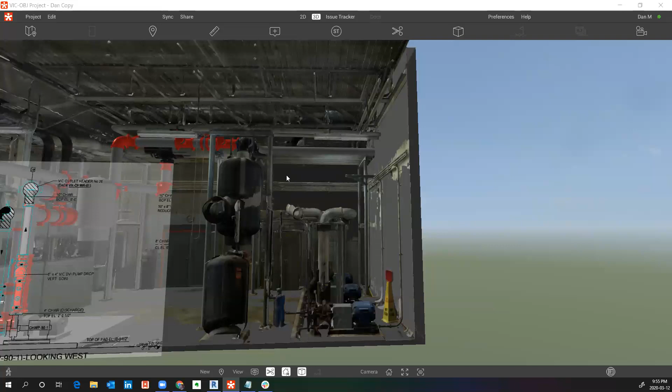Is it okay, Ian? I might have to repeat it just so the recording has it. Yeah, please do, I can't hear them.

So how important is Navisworks? How important is Navisworks anymore?

Navisworks still does what it's always done really well. It's good for translating an awful lot of file types and federating them in one spot. It still has a great clash detection process that, you know, all of the construction engineering market, if they're looking to replace it, they haven't had the winning solution yet to replace it.

So it's still pretty embedded that way. But I think you can read the writing on the wall that there are going to be new and more effective ways to do clash detection in the near future. And as those things start to come together and prove themselves to be as reliable as Navisworks, then I think they'll have a chance.

But in the meantime, if you've got that old beat up Chevy that still gets you around and does a few things that you like, sometimes it just might be you remembering that first date you had in the back seat or something. It may be more reminiscent than that, but there's still a place for it.

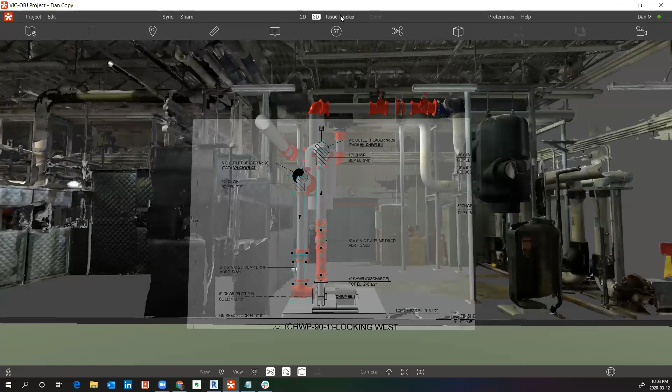I'll take that, and I would say absolutely. The story I told about the designers we have that use it as a way to organize, run, and make sure their weekly work is done—for them it's a task management tool on top of issue tracking. They're using it to assign work, make sure the work is finished, and make sure what is assigned is done. There's accountability for it, so a lot of people found value using it internally, over and above what they use it for otherwise.

And really, when you think about it, when you use the platform and pay for the hub on a project, you can have as many projects as you want. So there's no harm in using it for your internal project coordination as well, because you have it—use it.

Very similar to how Carl feels about that—a lot of our engineering and consulting firms are introduced to Revizto typically by coming onto a bigger project being run by a GC or an architect, and then they're exposed to the benefits of working in that environment.

Typically one of the things we try to do is use our customer success team, who come from considerable experience in architecture, engineering, and construction. We'll set up meetings with the appropriate member of our success team to help them figure out the application for themselves and their organization.

Much like Carl said, once you've got the licenses in there, it's easy to start using it on multiple projects and get the benefit across them. The accountability part of it is huge, and the reporting part is also huge—there are people who rely on Revizto every day, who spend all their time in the reports to keep track of other people.

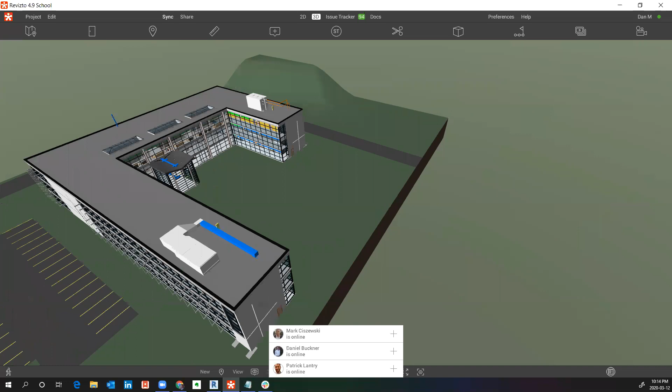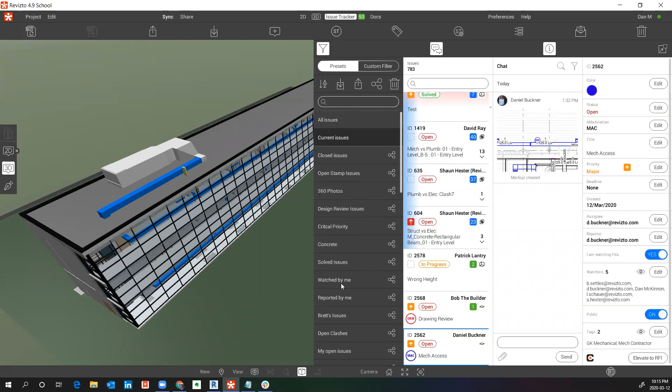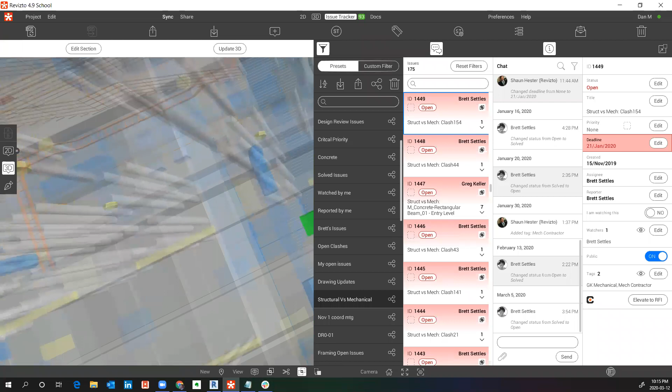If you can show us again the issue that came from Navisworks - sure. With any of the clashes that come in, essentially what you're looking at is a screenshot that comes out of Navisworks. We have it translated here in the 3D so you're able to find it and explore it in the model. But that doesn't mean that's all we can do with it - I can go into this model and turn off the clash view and turn my solids back on again, just as simple as that. Or I can make it more transparent so I can explore through it as well. So Revizto depicts a view similar to what you see in Navisworks in the screenshot, and tries to give you tools here in 3D to help you continue to isolate that out of the model. But like I said, I can turn that all off and be right in the 3D model again. Does that answer your question?

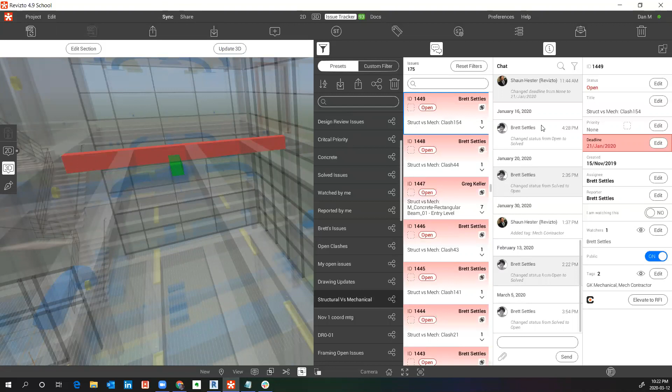Yeah, Revizto works on Windows, Mac, and tablet devices like iPads and Microsoft Surface. I'd say about half the firms I know in Canada use one or the other. Inside the iPad environment, the user interface is exactly the same, so you can jump from platform to platform because we're username based. On the tablet, you'd have an issue you're working on, click here, click photo, and take a photo right with the camera from your iPad or laptop. It would go right into the chat window and be associated with the particular issue you're calling out.

And again, because we can download to the field, you don't have to have a persistent internet connection to use all the tools.

We are an internet-based platform, so unfortunately at this time we do need an internet connection, although most job sites and people have connectivity through job site Wi-Fi or cellular. If you're three stories down in a parkade, we're kind of out of luck in that scenario. But the idea is you log into the web interface on whichever device you're using, phone, tablet, or computer, take an image with that, and attach it directly into the issue like we showed on screen. That's how the process works through BIM Track.

I don't think we have any questions here, but I know there are some people connecting remotely. I don't know if there's a way to unmute them or have them raise their hand, but they can unmute themselves if they want. There should be a mute option right next to their name they can turn off if they want to say something.

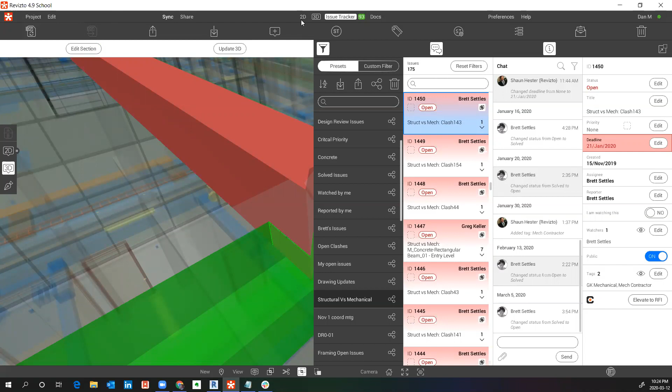Okay, we just have six minutes because it's going to get loud here again with renovations. No problem, I guess if anyone online has a question, you can unmute yourself and speak. It doesn't sound like it.